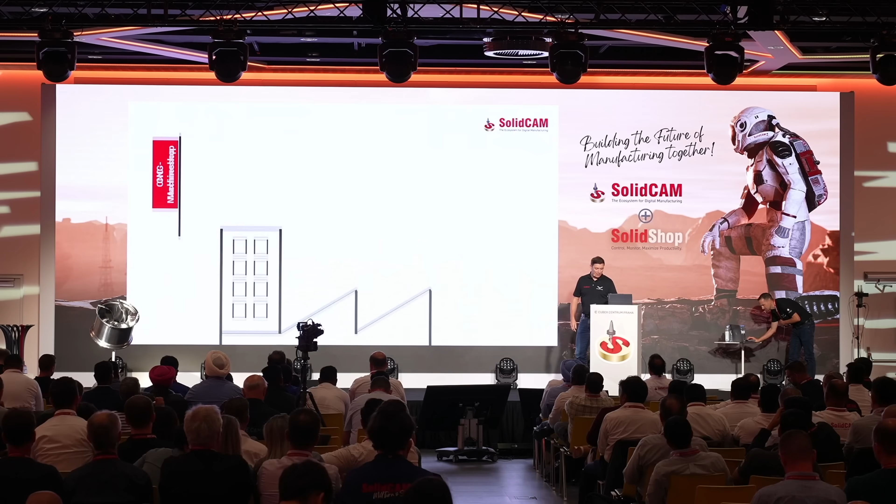I will show it live, but first I want to explain to you why it is so important to have tools like this. So I created a machine shop. I want you to imagine we are sitting in a machine shop. Anthony is the actual CAM programmer who is doing programs for me, sitting there all by himself, programming a part.

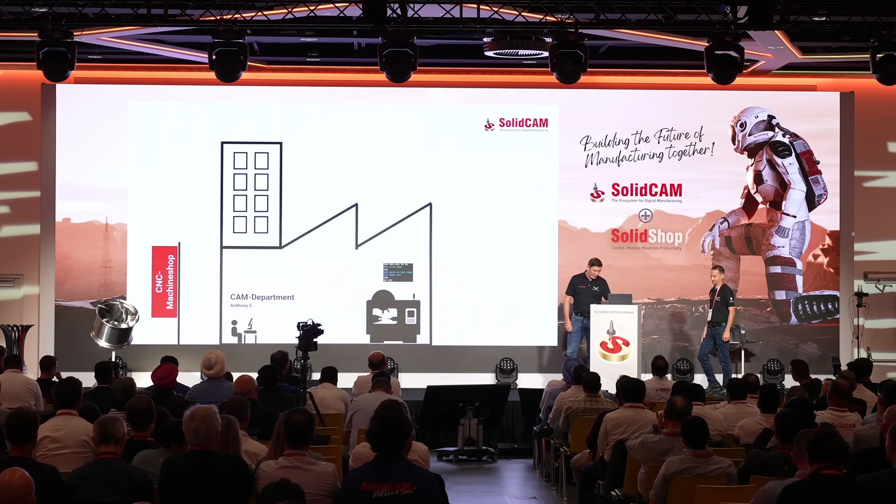When he's done, of course, he gets a G-code. He sends it to the machine. And then there is the operator, which is me. So Michael, at this point, is angry. First of all, he's angry because he's a German, which we all the time.

And second of all, I'm quite unhappy about the things that Anthony did. And I think this is happening all over the global machine shops, right, Anthony? Absolutely, same in the US. Angry Germans, too, in the US as well. Yeah, it is what it is.

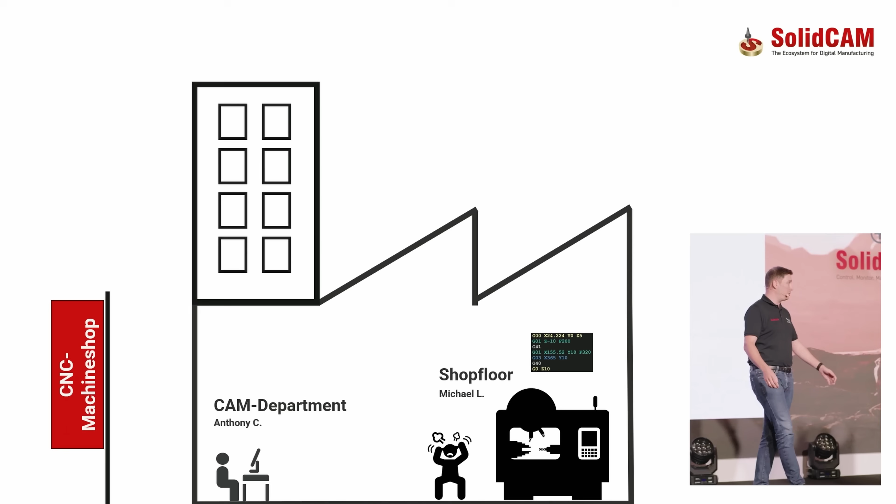When the machine and the actual CAM department are sitting in the same facility, it's easy. We just talk and say, Anthony, tool number 1, completely wrong, please change it, do it again. He's usually dragging me to the machine, telling me what he doesn't like.

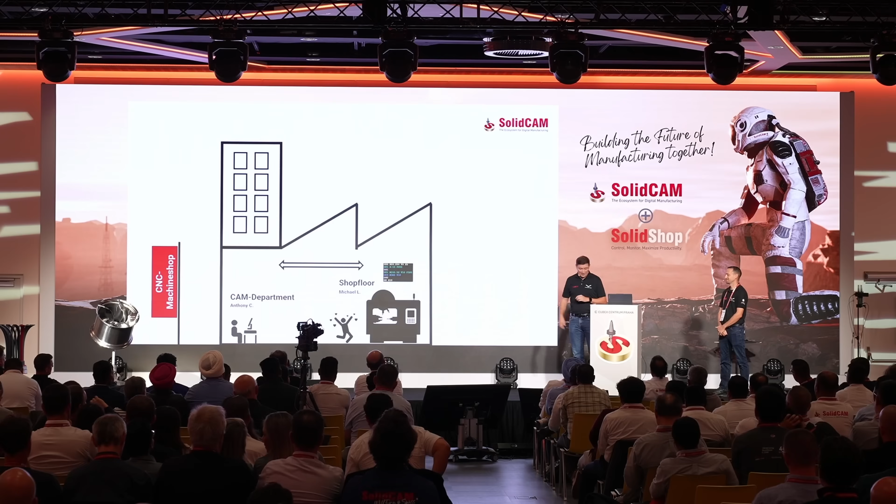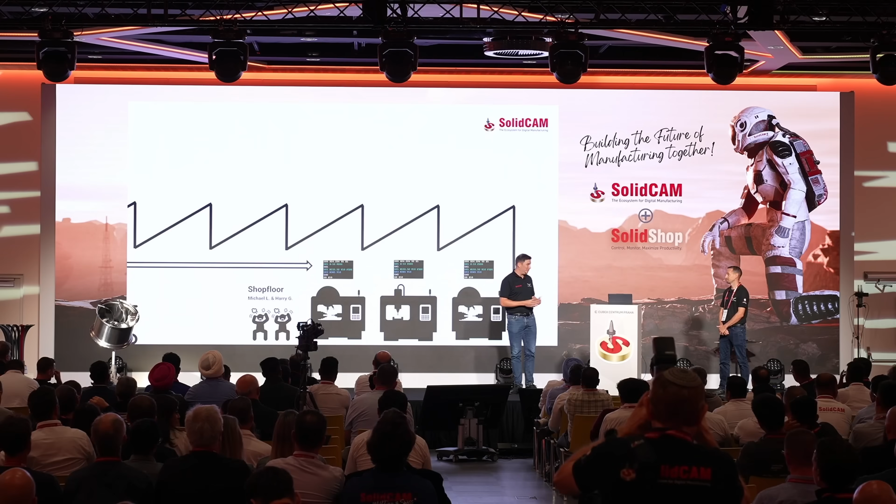But there are machine shops who are not built like this. First of all, he fixed it, the German is happy now, so there are a lot of hearts, everything works. But there are companies who are not just one hall. There are companies who have multiple departments between the actual CAM programmer and the machine. So now we have more machines, we have Michael and Harry completely unhappy about what Anthony did, and we don't like it.

So there are solutions to fix that, right? If you're nice to me. Yeah, I will, I will.

Just take this as an example of what's happening in a machine shop. Of course it's an illustration, but this is the reality. So the guy who programs it and the guy on the machine are not sitting at the same place.

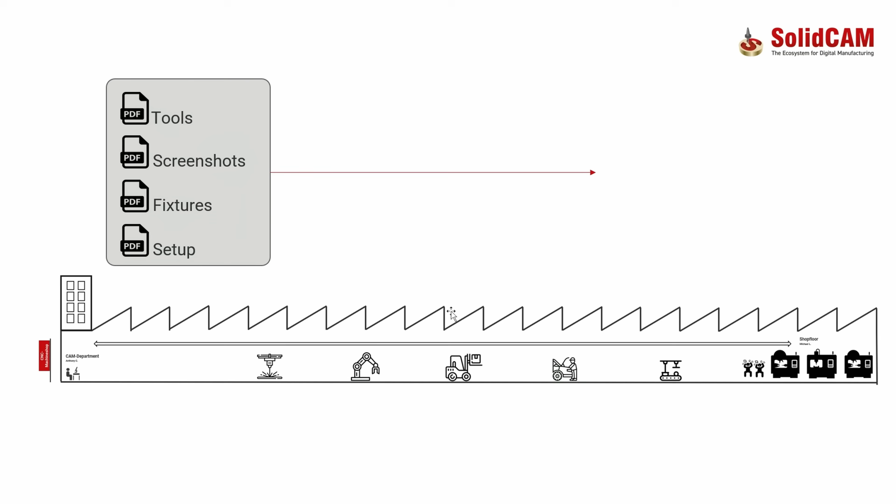This guy would send me the tools printed out on a PDF, or if the machine shop is advanced, it will be stored on a server or in SolidShop PDM, for example. He will send me screenshots about how the part is clamped, the fixtures, everything I need to know in order to run the part, but I have never seen the actual simulation or nothing. So I'm staying in front of the machine, eyeballing it, and just hope that nothing will crash. We don't like it, I don't like it. So yeah, he sends it, and no, this is not what we should do at this time.

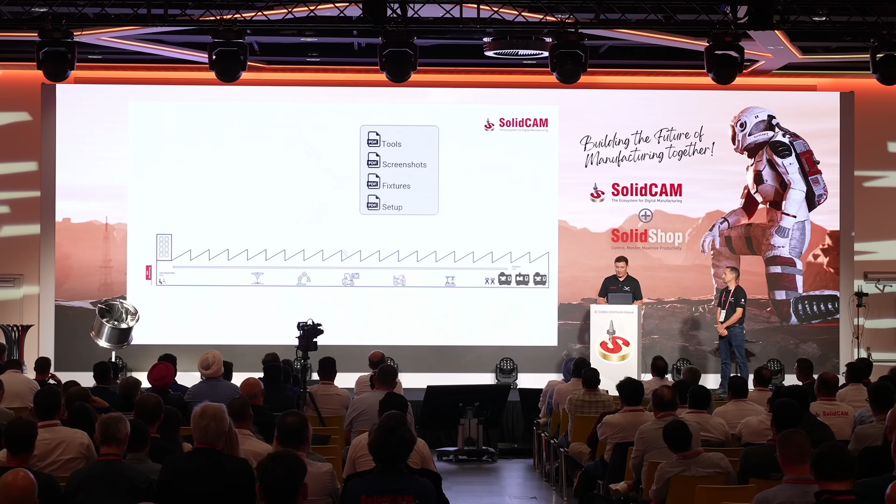SolidCAM for operators is solving this problem, because just imagine you have a tablet like this installed on your machine. You have a not-so-fancy computer installed on your machine. You have it actually running on the machine, which we have seen earlier, because it was installed directly on a Mitsubishi controller.

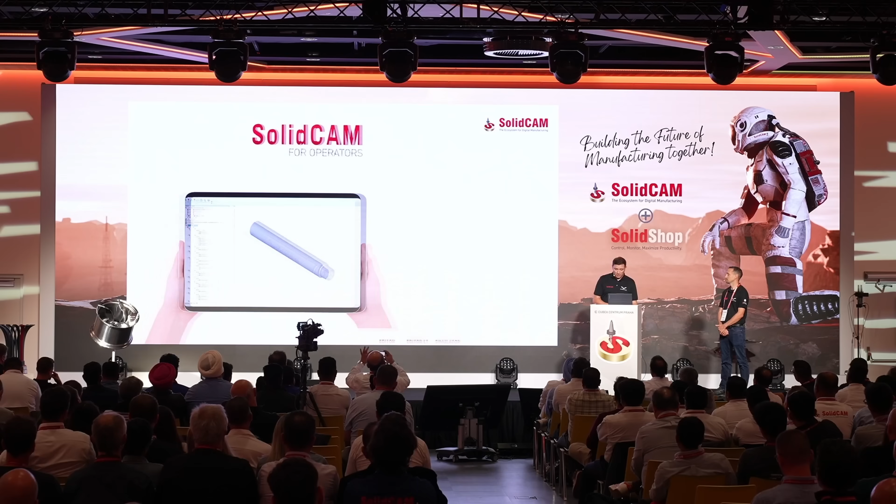We split SolidCAM for operators into 3 different levels. So Anthony, would you tell us about what you think I would have to use as being your operator? You're only getting the simulator, that's it. You're not even allowed to change any feeds. Ah, damn it.

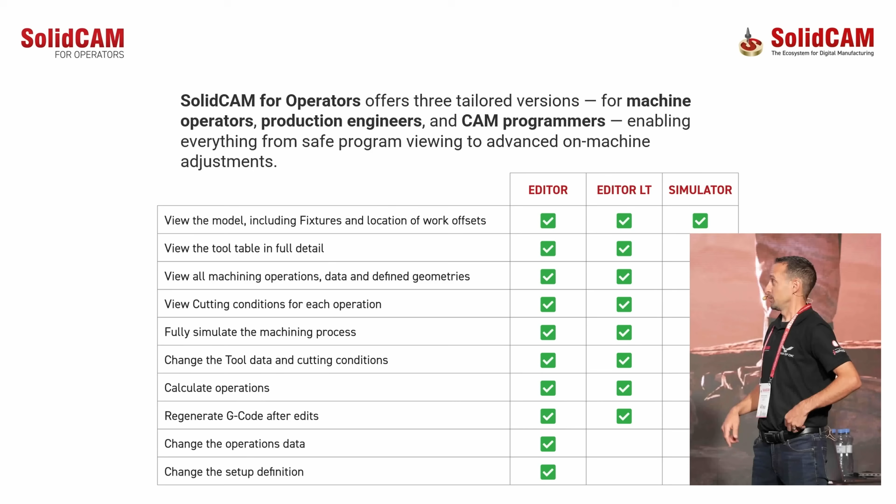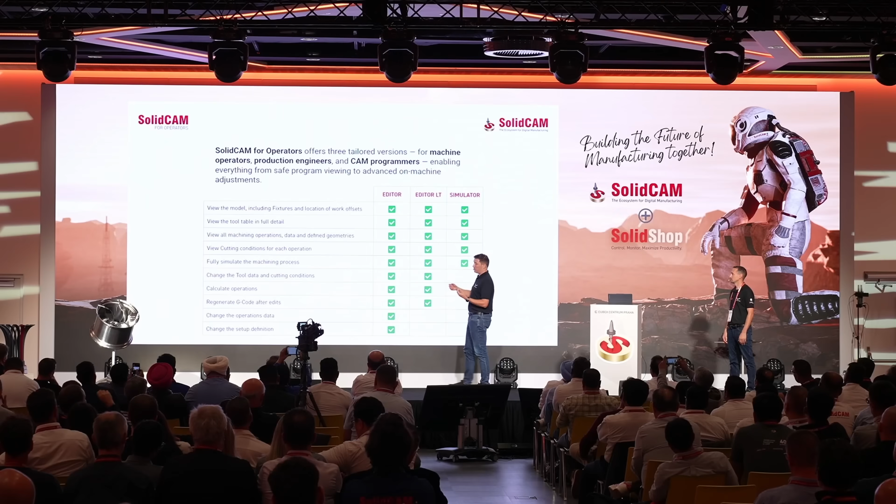Nothing, nothing. OK, so the idea is you have different people working on the machine. You have guys who are really experienced, they get the full editor, they can do whatever they need to do: calculate operation, regenerate G-code, speeds, feeds, depth of cuts, whatever. We have the LT, which is a little bit more limited, but you can still change everything you need to change, watch the simulation, and you're good to go.

And then you have the simulator, which obviously is for me, because I'm not allowed to change anything.

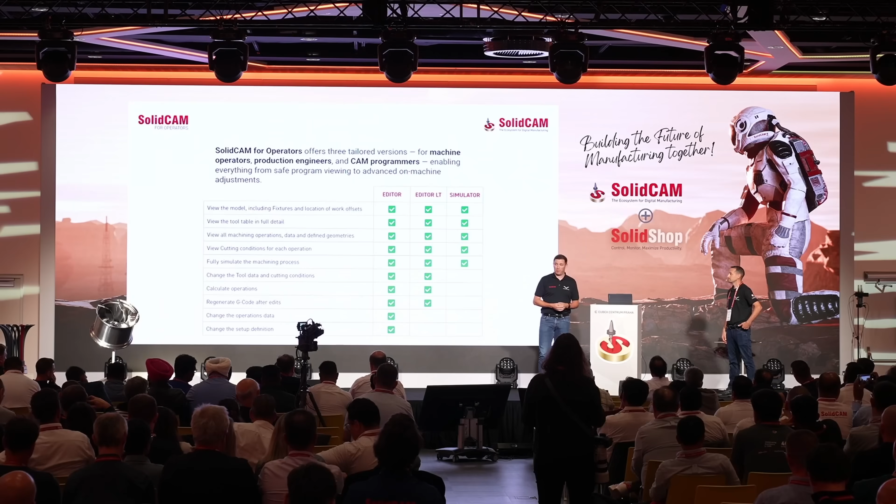This is why we make sure that everyone who is working on a machine has exactly what he needs. The most important thing is that this guy on the machine is part of the whole digital chain. Sometimes people on a machine are very scared because they think they're just the green button pushers. But now we have them on board, we can give them something, they are fully into programming.

Anthony, I was talking about a perfect machine shop. Can you explain a little bit of how this works with SolidShop in a perfect setup machine shop? Yeah, so in a perfect world, as me being the programmer, I'm taking the engineer's model, I'm doing the planning.

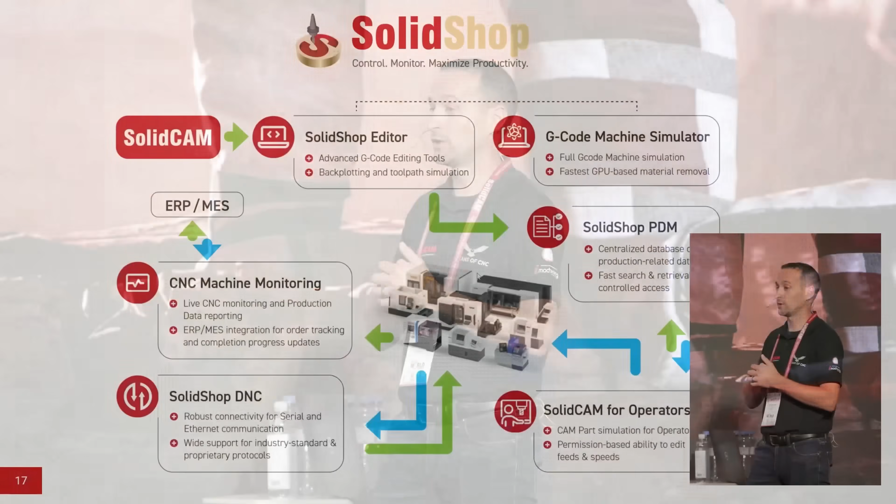I'm making the CAM program, I'm also having to make all the setup sheets, preparing all the G-code. And in the perfect world, we want to be able to take that and dump that into a PDM, so that way it's revision control, G-code, setup sheets, the program. You know, if you're AS9100 or ISO certified, you need that.

And then as you know, as the operator, for Michael, this should get into your ERP software, so that way production actually hits management. Management lets the shop floor know, hey, you need to run 50 of these parts. Here's the work order. Then Michael, as the operator, he's going into SolidShop into the PDM. He can download all of his information, setup sheets, G-code, whatever. He should be opening up SolidCAM for operators, simulating and being able to understand what's going on.

Once again, in the digital world, we talk about the setup sheets, the PDFs. In a very simple shop, if you're doing very simple parts, a PDF can transmit most of the information. But I think most people nowadays are doing more advanced parts, and the setup sheets do not give all the information. And that's where you need SolidCAM for operators to be able to see that.

And then you're going to use DNC to dump the program directly into the machine. As soon as Michael starts making parts, the management is going to be able to see on the monitoring everything that's happening. So this whole Industry 4.0 wrapped up all in one.

I think, as Daniel said, the beautiful thing about SolidShop is that we're not having to do everything all at one time. I don't know how many people have been in the shop and really felt that, but I think what Daniel said was right. Usually with MES and ERP, it's an all or nothing thing. You really have to do a big jump and implement everything, and it's expensive and very deep to do. But with SolidShop, you can kind of take these steps and reach this awesome, amazing level of ERP, MES, PDM, and all that stuff.

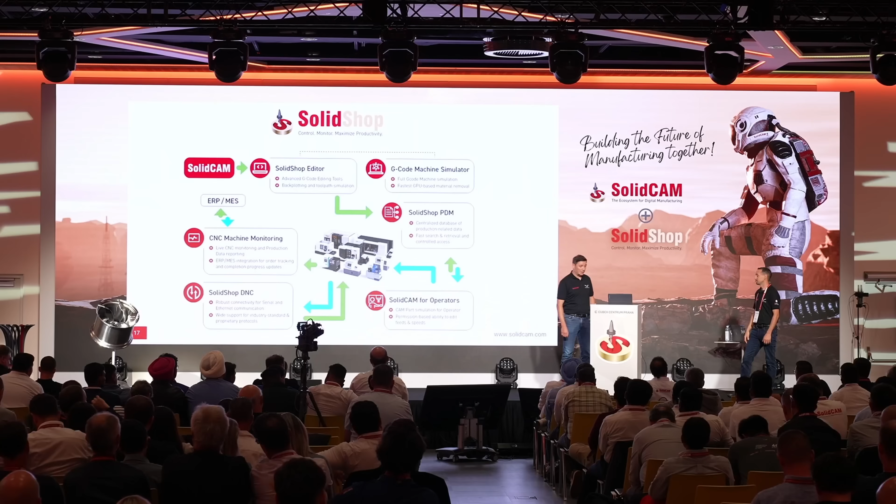Yeah, you were absolutely right. But that's a lot of talking. Let's jump into SolidCAM for operators real quick. I want to show you how it would look like in real life.

So this is, as I've mentioned, this is a tablet. I'm trying to pull off a tablet thing, let's see if this works. Yes, so imagine this is just a Surface tablet, because obviously this has a keyboard attached, so it's not. So let's go back to the real world scenario. We open the part, I'm staying in front of the machine. As you can see, I'm already working in a backup folder, so there is no backup of the backup anymore.

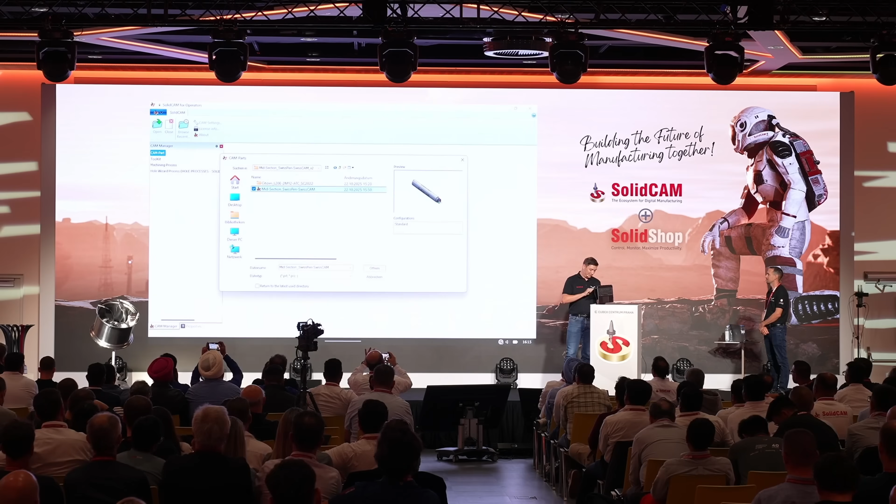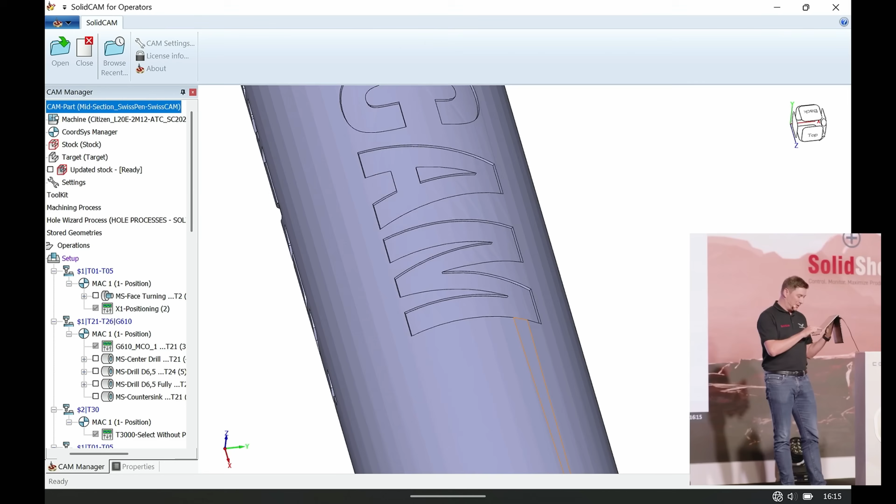Okay, so we open the part. First of all, I'm seeing the part as the operator for the first time. I had it printed out as a PDF, but I had no 3D model of it, so I have no clue what this guy actually did. So I'm going to first of all have a look at the part. So what it is, it's obviously the middle section of an aluminum pen we machined for that demo. And I'm just checking, okay, there is a thread, there is a hole, outer diameter, engravings, milling, and so on. But now I have to set up the machine, right?

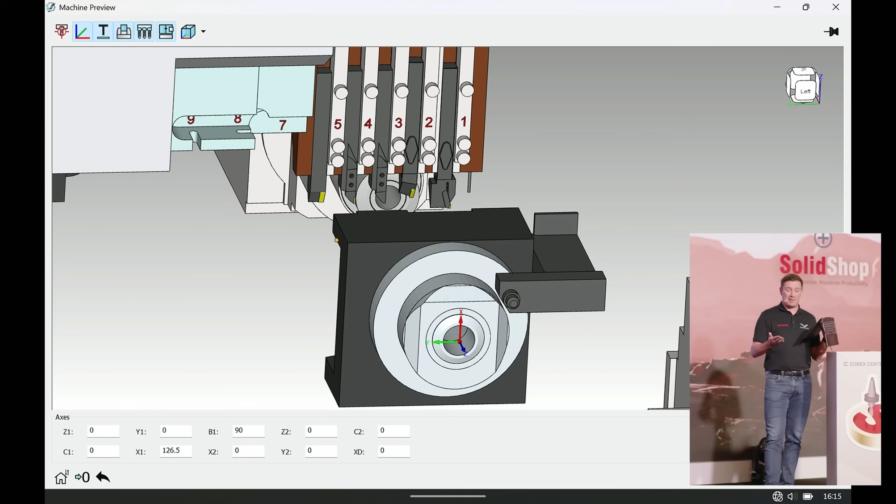So the first thing I usually do, I open our toolkit and open the machine preview. You cannot imagine how handy this is when you're standing in front of the machine, just zooming in and seeing what tool needs to go where. As you can see on a Swiss type machine, you can place tools almost anywhere, and you don't even know what you're doing otherwise.

I have no clue about Swiss type machines in general. Can you imagine me trying to explain to you through paper all of those tools, how they're set up, in what stations, how much they stick out? It's nearly impossible. Even if you print out 100 PDFs, it will not do justice.

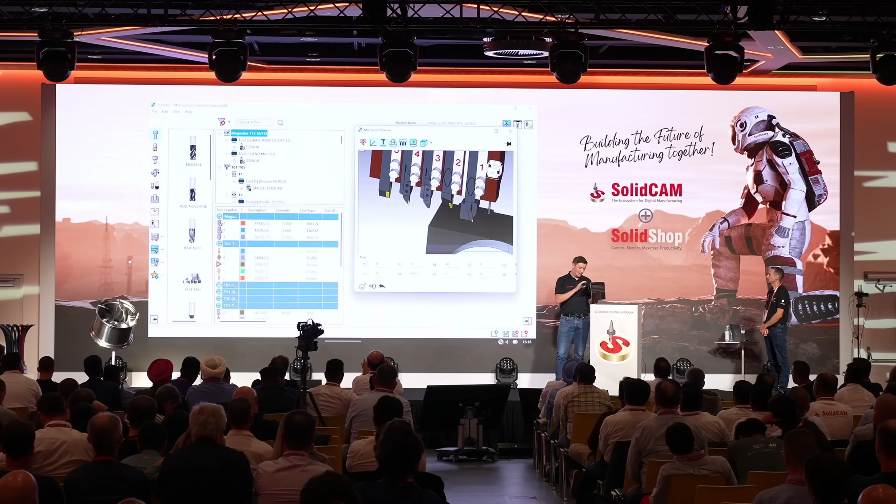So that's the first thing we do on the machine. In addition, something really handy a lot of people know: when I don't really know what tool number or gang post 3 is, I double-click it, and it will automatically display it inside our tool catalog, which I think is pretty awesome. You can do it on every tool station. Let's use this one here - it's T5. So it's very easy to set up the machine.

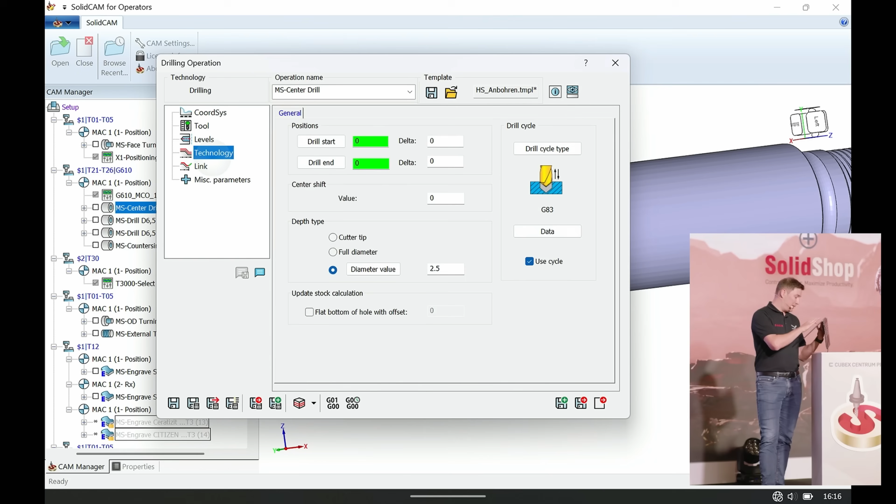What SolidCAM for operators is also good for - the first thing was a face-turning operation, but let's use the center drill. I open it, I go to levels, I check. I think Anthony has absolutely no clue about how fast this machine can go. No idea - 5,000 RPM, are you crazy? It will never work. So let's say 4,500 or 3,500.

I make Michael put a 9 at the end for every feed and speed he changes. That way I know later what was changed.

So what I want to say with this - it's on the machine, you can change it. He knows then exactly what we changed, because in the proper world he's getting a report from me about what I changed. But I was able to change it, for example, in the night shift, where he's not even there because he's at home with his family when I have to work. I'm sorry. Yeah, I know. Not really. Yeah.

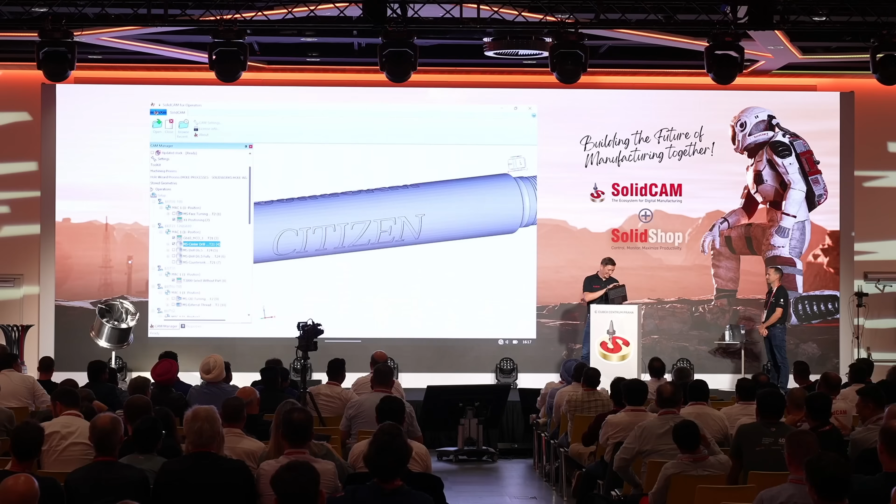Okay, so finally, before I run the part, I want to see what's happening. So let me open the machine simulation real quick - will take only 10 seconds. Just imagine, this is a very low-spec tablet, so you don't need a very fancy computer in order to run SolidCAM for operators, which I do think is amazing.

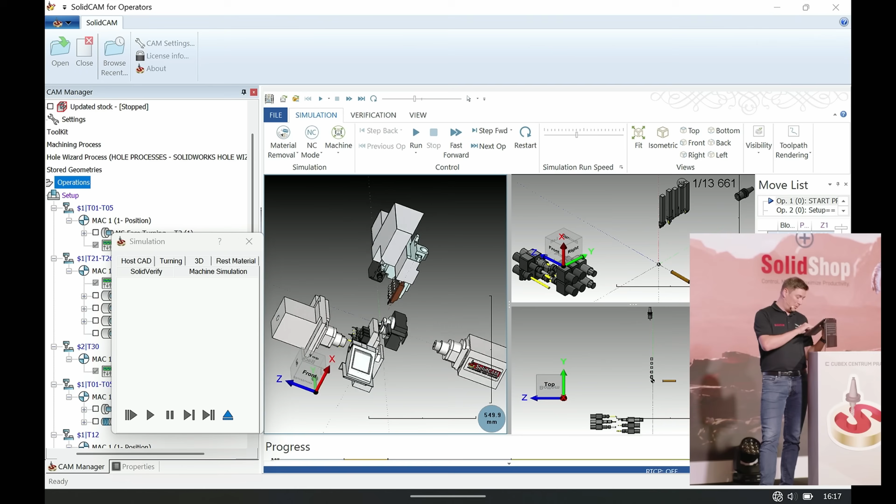So machine simulation is loaded. You can see that monstrosity of a machine, but I know exactly what's going on. If I hit the run button, you can still zoom in. Probably you need to watch it 10 times to understand what's happening, but at the end I know exactly step by step, because it's on the machine, what will happen next. This is the beauty of SolidCAM for operators.

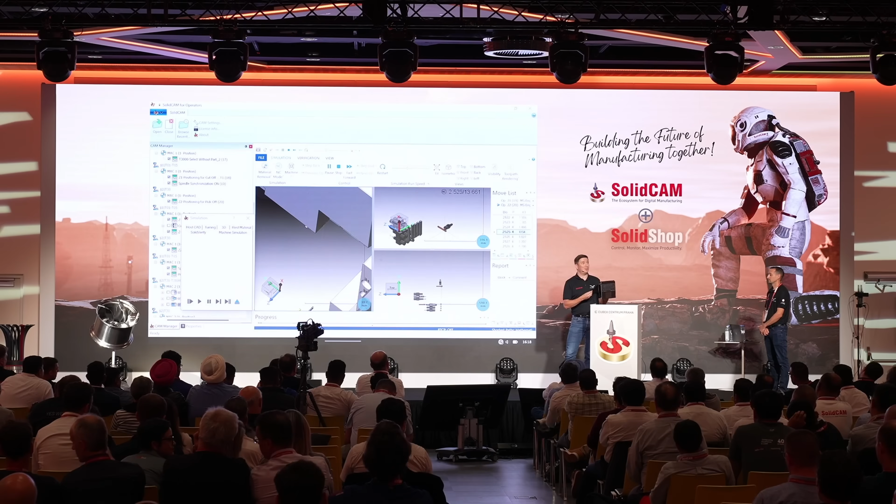And I think it's the tool you need in your machine shop in order to program and get your parts done faster. One of the most important things is that Michael is working with the same software that I work with as a CAM programmer, so him and I are now talking the same language.

So, SolidCAM lingo, toolkit - that's something we call it. Michael's not saying words and trying to explain things to me. He's saying, 'Oh, I opened up toolkit, I saw what you did in T5, I don't think that tool's sticking out far enough.' Or, 'Hey, in the machine the tool's actually a little bit longer, it's going to stick out longer.' So Michael and I are now talking in the same language.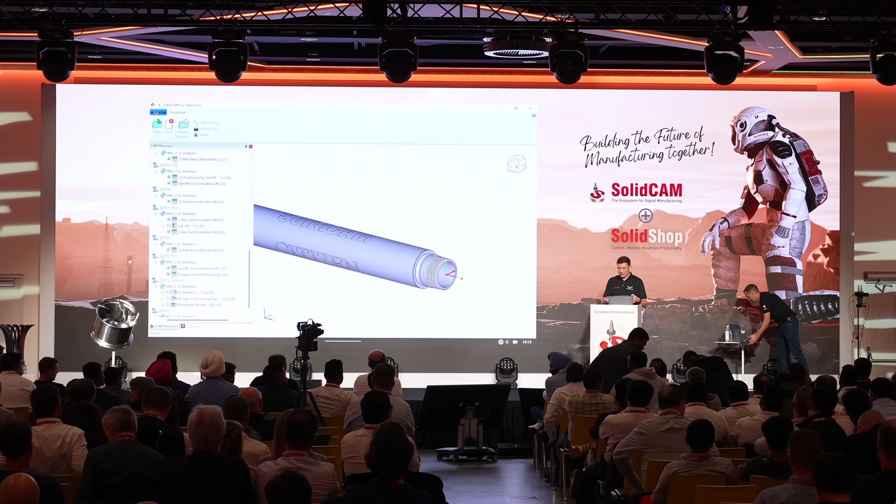I'm not sure if we talk the same language, but at least we're talking about the same part. Okay, but there is more to SolidCAM for operators. I think we need to switch laptops real quick. Because it's not just a tool for staying in front of a machine, it can do actually a little bit more, and we are going to show it to you now.

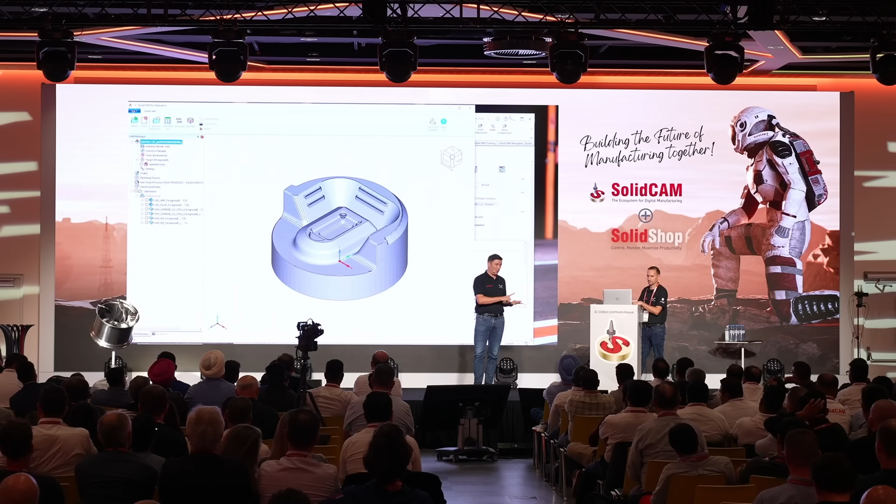The most important thing right now, as we've heard today from Titan, is to get the machine shops, our customers, more effective, because we need to produce parts faster as competition from all over the world is getting very tough. So we need to be more efficient, our customers need to be more efficient. With tools like this, you definitely can be more efficient, and this is something we can give to our customers which will help them immediately. So for me, every customer of SolidCAM needs SolidCAM for operators.

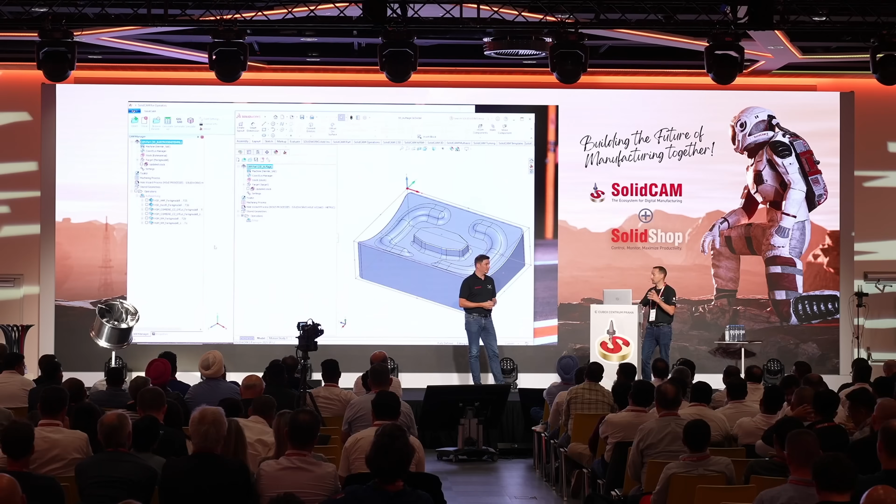An awesome part about SolidCAM for operators is that it's included in every install of SolidCAM. So me, as a CAM programmer, not as the operator, I also can use SolidCAM for operators, which you would think like, well, you're not an operator, why do you want to use it? The cool thing is it can be used as a lightweight viewer. Many times I'm programming parts as a programmer in a shop with multiple machines, I'm servicing multiple machines, right?

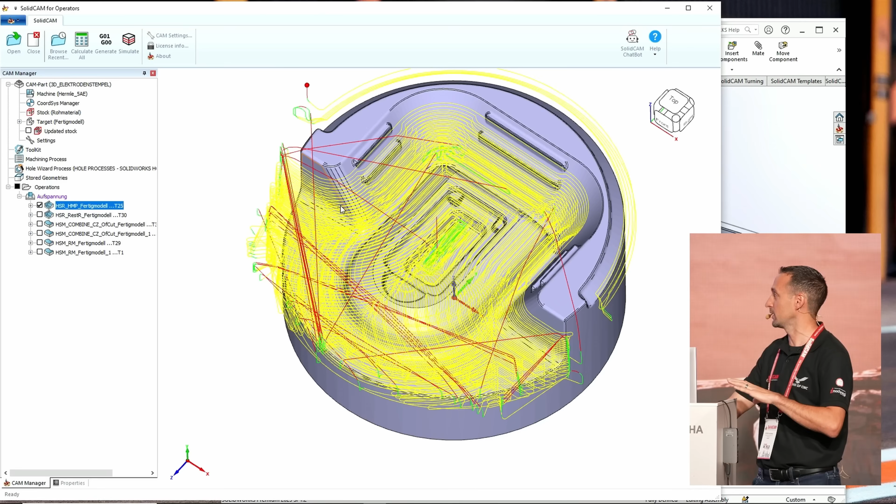There's Michael, there's Harry, there's Greg, everybody's coming at me with, hey, I'm having a problem with this. You're in the middle of programming a part, and now you're interrupted, and Michael's like, can you open up this part? I'm having an issue. With SolidCAM for operators, you can just open it up, and once again you're a full user of SolidCAM for operators. So if Michael has a problem with a step down, step over, something like this, because I didn't give him access since he's just a simulator, you can still make those changes.

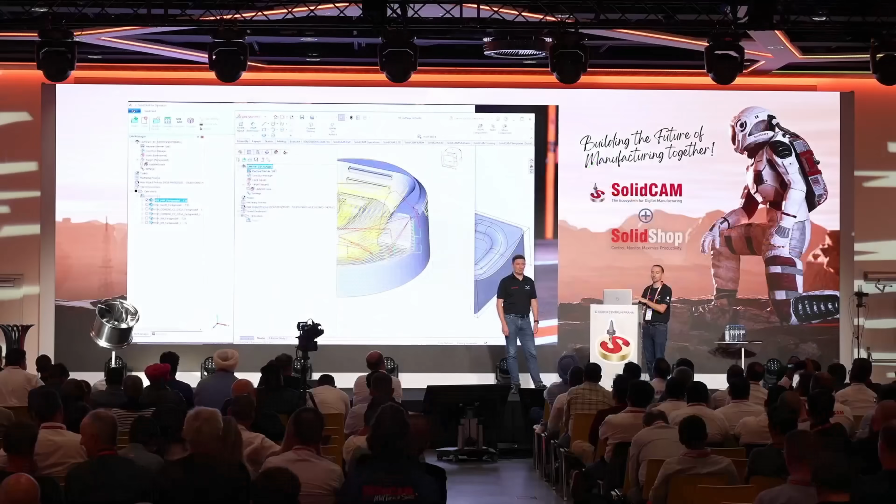You can use SolidCAM for operators as another lightweight simulator to review multiple parts without interrupting your daily work. One small feature we recently added, which Michael requested and I think is pretty cool, is the ability to copy-paste operations from SolidCAM for operators to SolidCAM. Pretty cool. Wait, we didn't demo it yet.

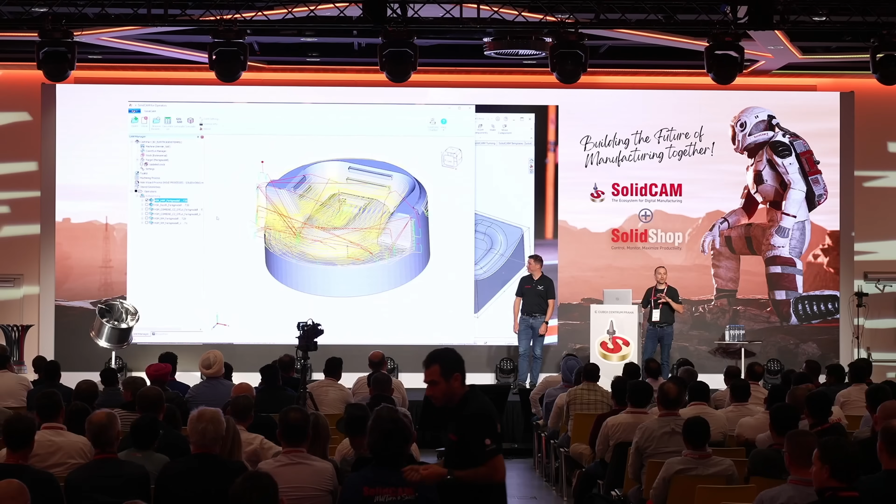The cool thing about that is, sometimes you want to be able to take a tool path with a tool and everything from one CAM part to another. So I'm just going to show it. It's not the most amazing demo, but you can copy a tool path from, let's say, SolidCAM for operators, and paste it. By the way, his screen is still only back there, it's super tiny, so hard. I apologize, you need glasses.

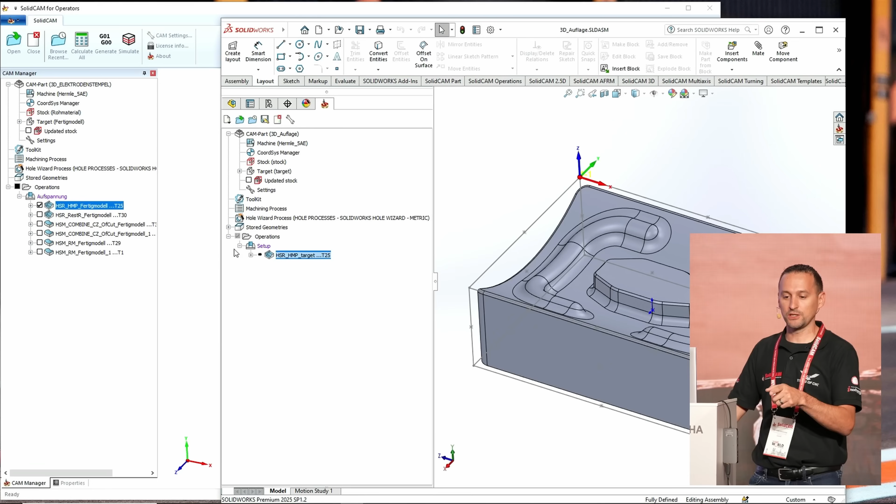I do. Paste. So now this HSR operation was copied over, it came in with the tool. Since it's a completely different CAM part, you get a couple little warnings that we need to fix. I'm going to go over to the upper level and just reset that parameter because my coordinate systems are in a different place. Then you can calculate, so this toolpath from the one CAM part is now calculating over here.

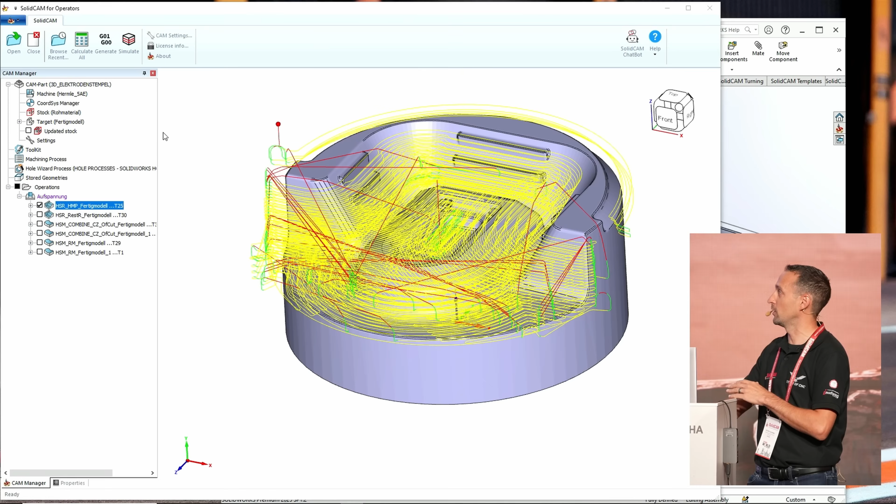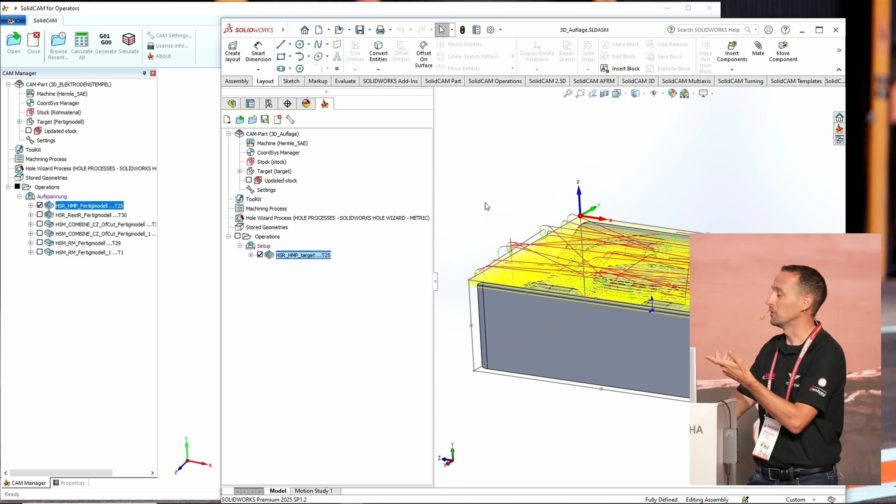While that's happening, you can jump - let's say I want to jump back into the other part, and just check what feeds and speeds I was using in here. So while SolidCAM is calculating this same operation with this tool in another CAM part, I'm over here making edits and kind of looking it over. And then when the toolpath is done, you get your toolpath calculated in your second part. So, not the most amazing thing, but it is amazing, these little things, they're helpful.

So that's our short demo of SolidCAM for operators. Please try it, it's awesome. Now we have the copy and paste functionality as well, so not just for our customers, but also for us working in support or in front of the customer. Copy, paste jobs, one click, easy. Let's go. Awesome, thank you.